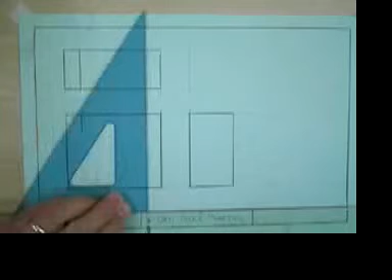there and there. Don't know how long it needs to be, right? And I can draw it there and there. Do that. 1/2 inch in, 1/2 inch in, draw those lines.

Do I not have the top view of the block completed now? Okay, it's 1/2 inch in here, it's 1/2 inch down. That's even easier because right side view, same cutaway, right? All you got to do is from the top edge of the front view, measure down 1/2 inch,

T-square. We're going to draw it here, there, and across there. Views are done.

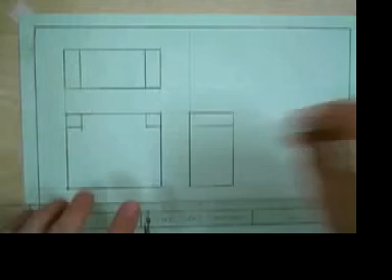Wait, don't stop yet. Don't stop. And then, if I erase these, do we have front view of block? Yes. Do we have right side view of block? Yes. Do we have top view of block? Yes. Voila. Do it. Go, draw it.

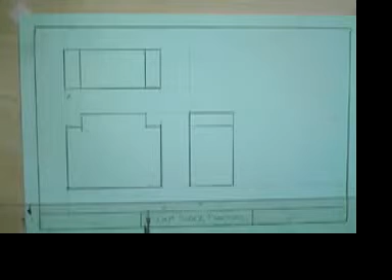Yours needs to look just like mine before we move on any farther. We got one more thing to do, and then we're going to dimension this bad boy. And heck, we may even be able to start on that block quiz. Hope you guys are still writing down those steps, because we'll be able to start on that block.

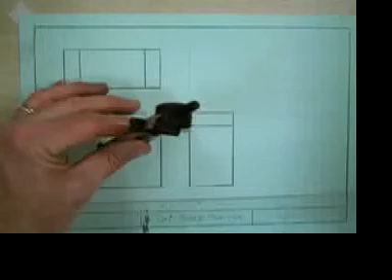You are going to make a 1/2 inch diameter circle, because that just happens to be the size of the hole that's drilled in the middle of your block. Now, there you go. We have to draw two different kinds of lines, 3 lines, 2 different kinds of lines on this center. I just gave away one of them right now.

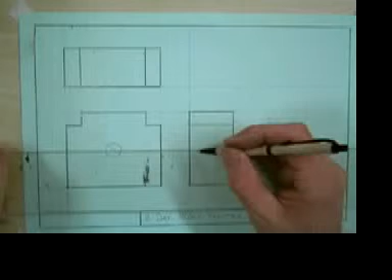Okay, so what I'm going to do is bring my T-square up. You see how I'm lined up right on the center of the circle? And then in the right side view, I'm going to draw - what do you think this kind of line is that I'm drawing right now?

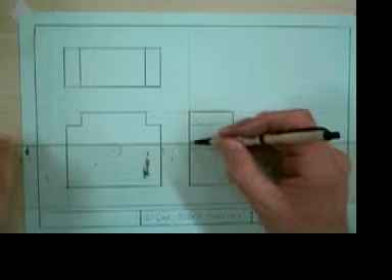Center line. It's a center line. No, keep looking. Don't draw yet. Keep looking, because I'm going to show you 3 different things. I'm going to come right to the very top of the hole, and I'm going to draw what kind of line? Hidden. And then I'm going to drop right to the very bottom of the hole, and I'm going to draw a hidden line. So that way I can represent the hole going through that block from the right side, yes?

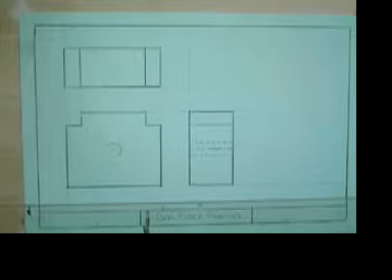Okay, would I not do the exact same thing from top view, yes? Center line, right where the center of the hole is, and then hidden lines on either side. So go ahead and do that. Right side view and top, center line through middle, and then hidden lines on either side.

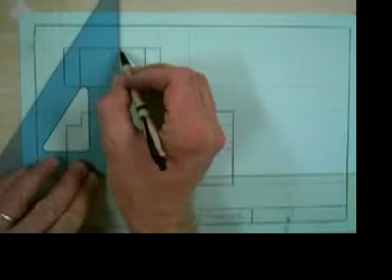Oh, wait, I know how to do it.

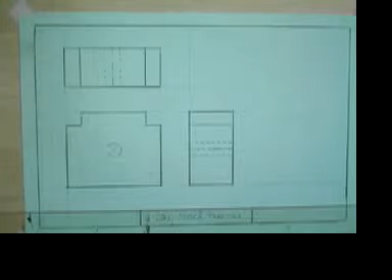That we'll use. We're going to use an extension line to extend from the object out, and then we're going to connect our dimension lines to those extension lines. Don't do this, but watch how I do it.

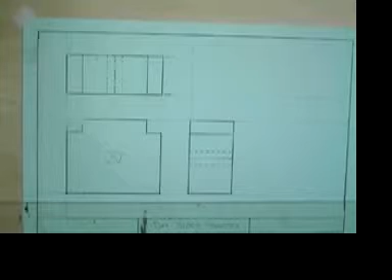I'm going to go here, and I'm going to draw a line there, and I'm going to draw a line there. What's the first thing that you notice about those lines? They don't touch. If they touch, they're part of the object. So all I did was extend from the object. You notice how it perfectly lines up with that one and that one, yes? Or as perfect as I could get it, okay?

Then, okay, knock off the dumb chatter. I don't need that. Okay, then I'm going to go here, and I'm going to go here. How wide did we say that was?

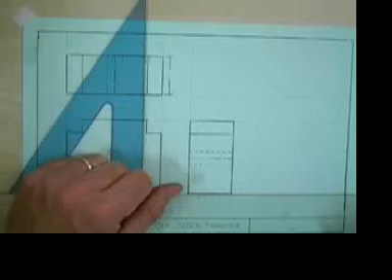Okay, move from the 3rd grade to the 9th grade and join us, okay? How wide did I say that was? Okay, I said it was 1.5 inches. So I'm going to put dimension here.

Is that enough? Got to label it, right? Is that enough? Yes. Have I dimensioned the width of that block? Yes. How do I know that's a dimension line?

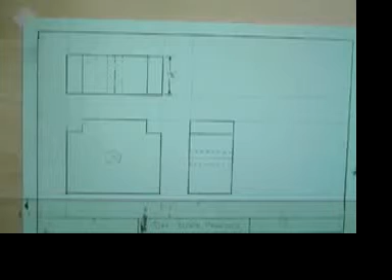Do you remember this? Remember that from our first line drawing? Okay, all right. I want them this way. I want all the dimensions to be facing this way. You can do it that way, Dominic, but we're going to keep them all vertical, okay? Just makes it easier to read your drawing.

Okay, let's see, I think I'll do the height of my block here. Hi Casey, how you doing buddy? There, oh, broke my lead.

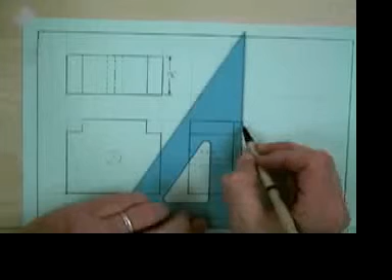And I think I'll dimension the height of that block. Somebody remind me, how tall was this block? Was it 3 inches high? Check it for me, please. Okay.

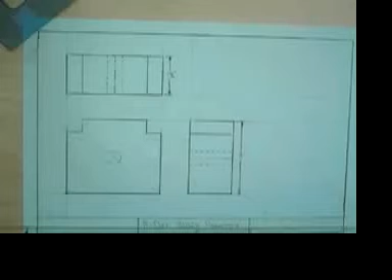Okay, before you put this dimension on, I want just 3, not 3.5. I almost did 3.5. Before you put this dimension on, I want to explain something to make your drawing look way better.

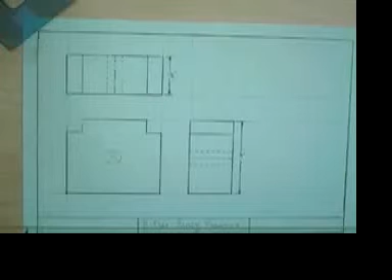It's not a real official thing, but notice how I put this dimension about, what is that, about a half inch away from my drawing, 3/8 inch away. Keep this one the same, keep this one the same, keep this one the same. It makes your drawing look better if everything is consistent. Does that make sense? Don't squish your dimensions too tight into your object lines.

If you do, the person trying to read the drawing gets confused. Keep them out at least 1/4 of an inch away from your drawing. I don't know if that's an official rule. I just know I've graded enough of these that it makes it look better.

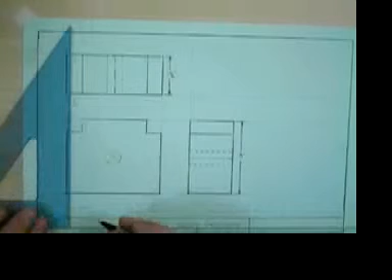And you don't have to measure everyone. You don't have to measure everyone. Just kind of give it a visual and try to get them as close as you can, okay?

Thank you very much, thanks for playing. Mine's an 8, an 1/8 is too close. That's one of those that it's like squishing it in too tight. Mine's exactly, that'll work.

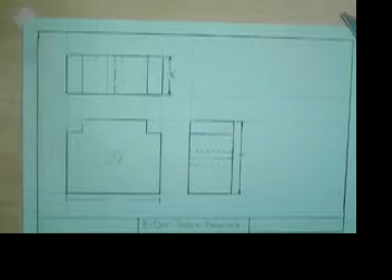Mr. Smith? Yes. Don't you have to do the height on the front view since... okay, show me. You mean on this one? But why would you have to do that? Because when we drew these lines, weren't they the same? So if I look at this drawing and I see that's 3.5, I follow those lines across, I know the front view is 3.5. Yeah, no, but I mean like for the little notch.

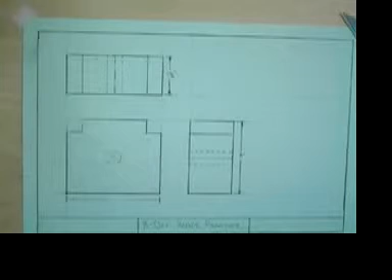For this, we're going to dimension that. We want to get these dimensions out because we're going to have to put some tight dimensions in there. Okie dokie? Alrighty then.

If it's an emergency for you, go fast. Take the hall pass. Don't drop my hall pass in the potty and flush it.

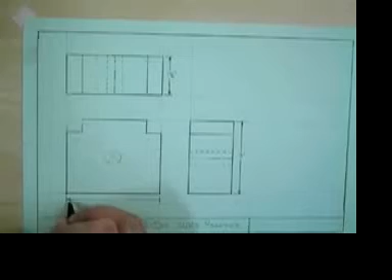How wide was our block? Was it 3 1/4?

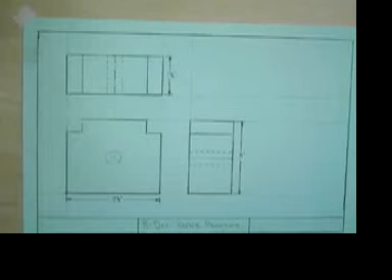Oh look, is that 1.5 inches? Is it 1.5 inches wide? Because one of these is not, that's not the same as that. Okay, I've got the height of the block, I've got the width of the block, I've got the thickness of the block.

I think I need to dimension the little cutaways now.

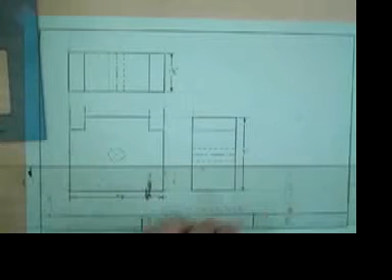Don't tell me to wait. That's okay, you can tell me to wait. I've just been wanting to say that all day.

Okay, everybody do exactly what I did on the 2 cutaways here, because I'm going to show you how to dimension tight spots that you can't get a dimension in between. Everybody draw these.

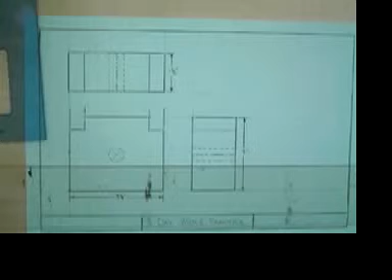Do that next thing with what you're doing right now. We can go on, we can go back, because I'm going to leave this up here for the rest of the period, and everybody's going to be able to finish it up.

Okay, if you have those, I want you to move your T-square up about midway on those where we're going to draw some dimension lines. So put your T-square there, and then you're going to do this.

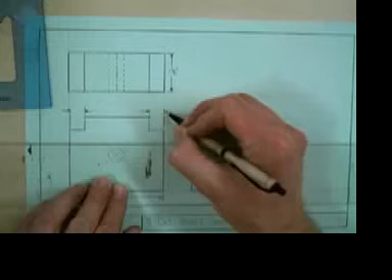Watch the board. You're going to draw a dimension line here, and there, here, and there, and you're going to put your arrow leaders pointing which way? In.

This is how you go about dimensioning a tight spot. Then you're going to put your dimension. What were those cutaways? Just like that. That tells you that if it's a tight dimension, anything in between the arrows is that dimension.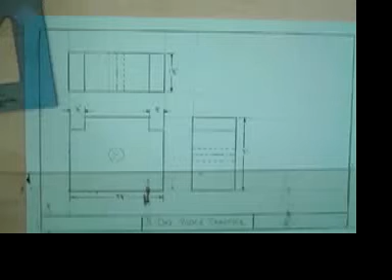I think we need one. What?

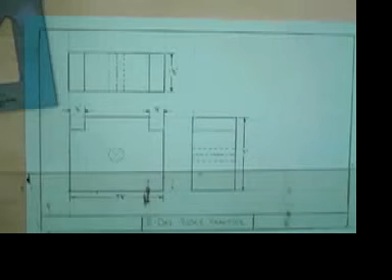One, two, three, four more dimensions, and I think you could build my block. Somebody tell me one. Come on, Kens, tell me one, kid. What about from the down in the... You talking here? Yes. Oh, that's the next one that we need to do, right?

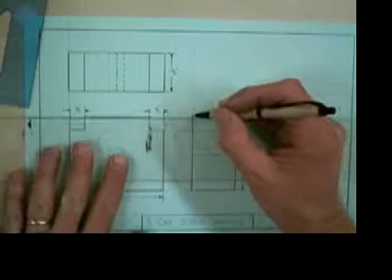Okay, this is what I'm going to do here. I'm going to go here because I don't have a dimension here yet. I can do extension line, I can do extension line, and then probably that same method again, yes, since it's a small dimension. Can't really fit it in between there without it looking sloppy and crowded. So here.

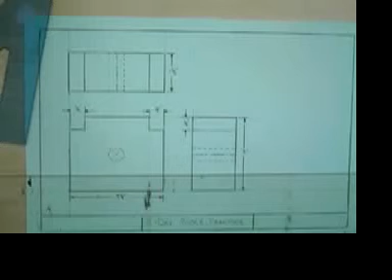3 more dimensions. Somebody tell me another one that we need. Holly, which one? Say it loud. The height of the circle? So you're talking about, I need to tell you if you're going to build my block, how far from here to here? Absolute, that is what you said, yes? You're absolutely right, that's one of them.

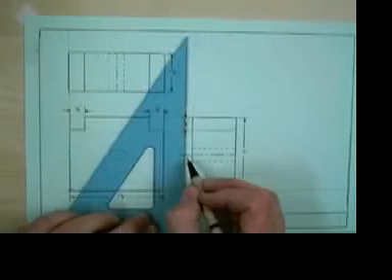So I'm going to do extension line here, and one right off of my center line because that's where we're going to measure it from, right?

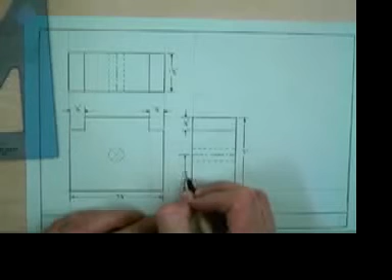Ooh, since this is a full-scale drawing and we just centered those, I've got to check that to see what that dimension is. Oh, that looks like 1 7/16 to me.

Looks good there. Okay, I've got 2 more dimensions that I need. Christine, tell me one. The diameter of the circle. Oh, the diameter of the circle. This is a tricky one. Everybody pay close attention to this.

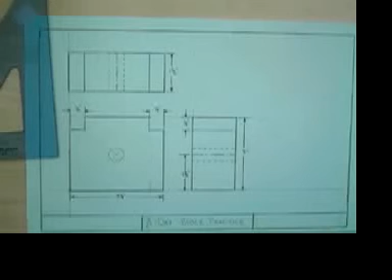When you dimension drawings, you notice how I moved all of these dimensions outside of my original block, yes? You never dimension a drawing - you would never put that dimension here because you move all of your dimensions outside of the original cutaway of the block. Diameter of circles is the only exception to that rule.

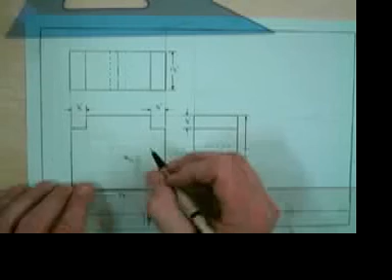And it's easy to do that. With any old straight edge, I'm going to go - well, let's go take it this way. Everybody watch, watch, watch, watch. I'm going to go here, and I'm going to go here, and I'm going to do, and then that was a, what did I say?

Half inch? Half inch. Going to break another rule of drafting quality lettering. When you're labeling diameter, you use small d. So I'm telling you that, because we've already got that here, right?

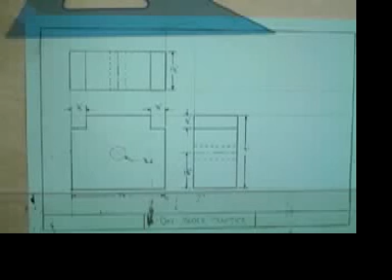Oh, I know, still looking for one. Which, Cody? From on the top view over to the middle of the circle. From here to there? That's it. You have to dimension that. We have to know how far into the center of the circle to measure.

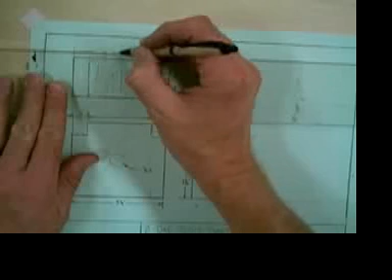So we're going to do extension line here, we're going to do extension line here, and we're going to measure it. Lay it out first. I'll do my - whoops, I just screwed that up bad.

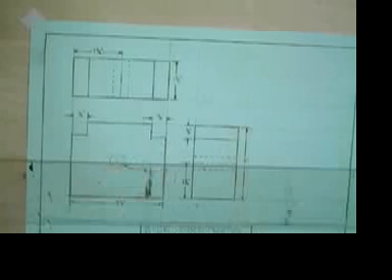Somebody want to be brave and measure that and see what it is? Oh, I think it's 1 5/8. That's what I get. Does anybody get anything different? Everybody get 1 5/8?